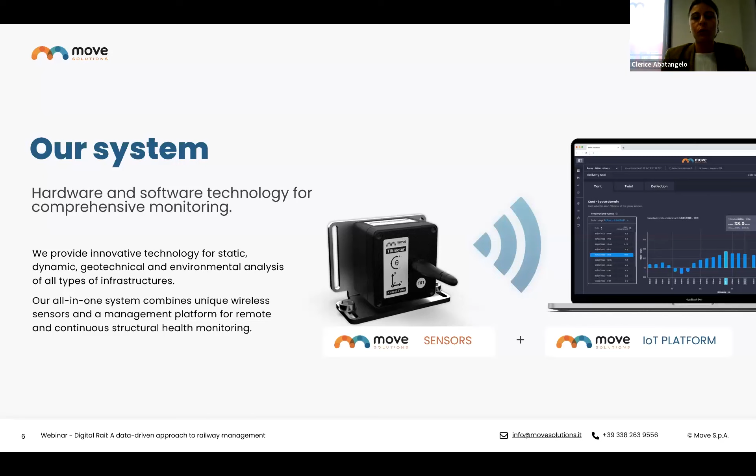It's an all-in-one system that combines a unique wireless sensor and management platform for remote and continuous structural health monitoring. As you can see here, this is our system architecture, where we have all the sensors installed in the specific infrastructure, buildings or dams or on the railway tracks or another kind of structure, and they communicate through the LoRaWAN protocol to a device that we call the gateway.

The gateway has a SIM card inside that uses the 3G and 4G network, the internet network, and sends all the data to our server. All the data ends up on our IoT platform.

On our IoT platform, you will see all the raw data, but not just the raw data, also the elaborated data. There are a lot of algorithms available, divided for the specific infrastructure, so we have, for example, the railways tools, the overlays. You will see specific tools and specific graphs where you are able to analyze all the data remotely, directly from your laptop.

Sometimes our customers already have their own platform, so we can also provide MQTT, FTP and API. So you will be able to see all the data directly on your own interface without using our platform. But for example, with API, you will be able to use our APIs on your own interface as well.

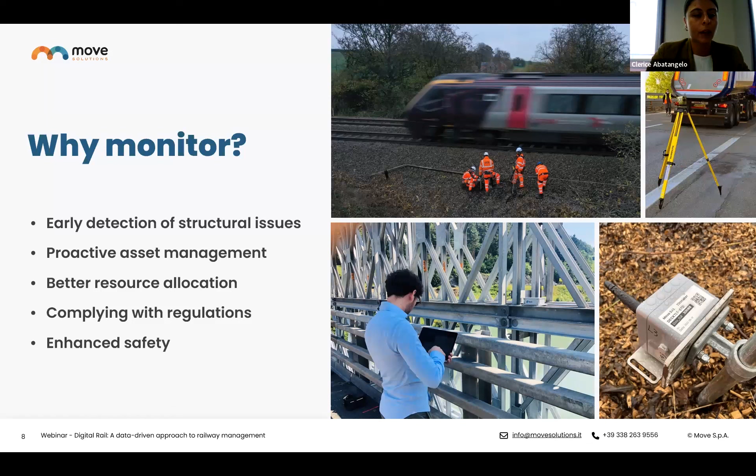We can do different types of monitoring. Thanks to our sensors, we can do static monitoring, dynamic monitoring, and geotechnical and environmental monitoring. So we have a comprehensive approach for safer and more effective asset management, developing specific solutions for different types of monitoring in order to analyze all the structural behaviors important for assessing the stability and health of a certain structure.

Talking about static structural health monitoring, static monitoring measures slow varying parameters over a long period of time, such as inclination, rotation, static displacement, and crack monitoring. So we provide products to monitor in a static way.

For example, our tilt meters. The tilt beam is a beam with our tilt sensor installed on it. And you can use our analog node and our single channel node, which are our data loggers.

For the dynamic part, dynamic structural health monitoring is used to handle dynamic loading such as frequencies, dynamic displacement, mode shapes, vibrations, and acceleration. With our sensors, for example our accelerometer, you will be able to perform modal analysis, and you can use our vibrometer to see the vibration.

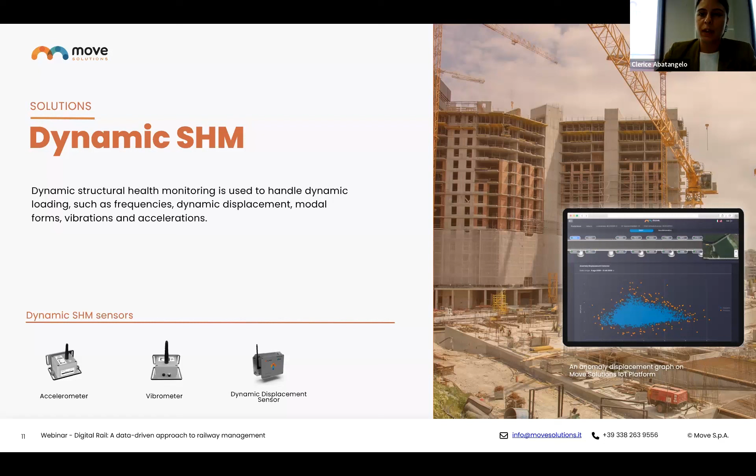Regarding the geotechnical and environmental part, the focus of geotechnical monitoring is on ground movement, settlement, slope stability, subsidence, and any changes that may affect the stability of a structure. Environmental monitoring instead looks at factors like air quality, water level, soil contamination, wind speed, and anything that can impact a structure's degradation.

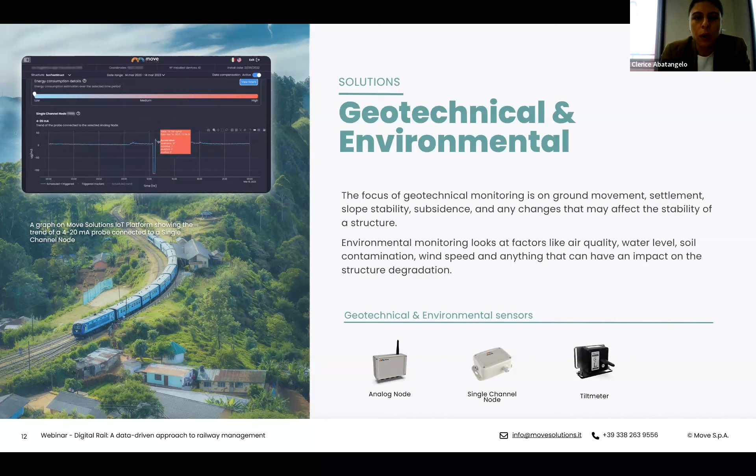So you can use our nodes, such as the analog node, single channel node, and tilt meter, to perform geotechnical and environmental monitoring.

Here you can see all of our applications, all of the industries where we are working. We have installations in construction sites, monitoring vibration. We have many installations on bridges, installations on railway monitoring, which is the focus of this webinar, and in other infrastructure like dams and other structures.

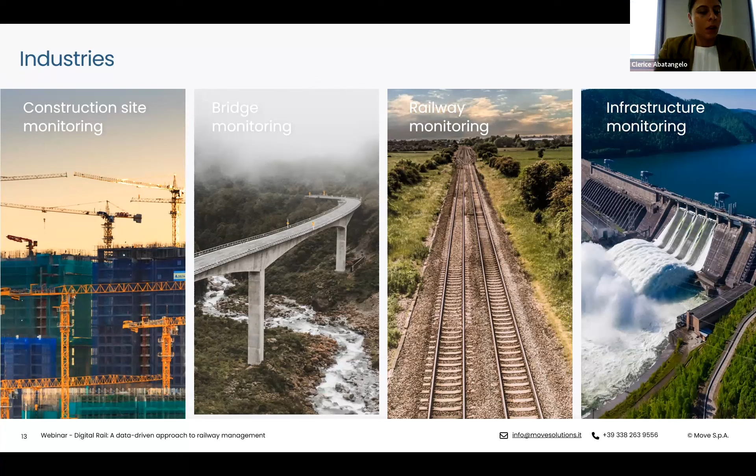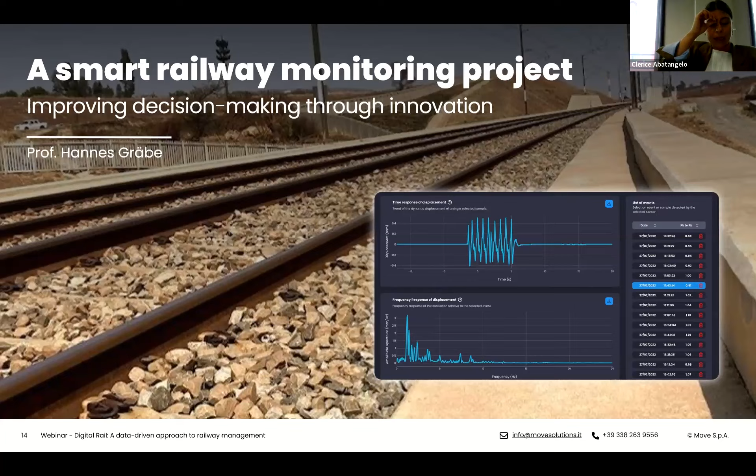So now I give the floor to Professor Hannes, who will explain his project. The professor used our sensors on a railway track in South Africa. Specifically, he used DEX, accelerometer, and tilt sensors to monitor a railway track. So thank you, Hannes, I give you the floor.

Thank you very much, Clerice. It's really a privilege for me to present this project today in collaboration with TANDM, our partner here in South Africa, and also with Move Solutions. I'm entitling this talk Smart Railway Monitoring, and I will be describing one project that we are currently busy with here in South Africa.

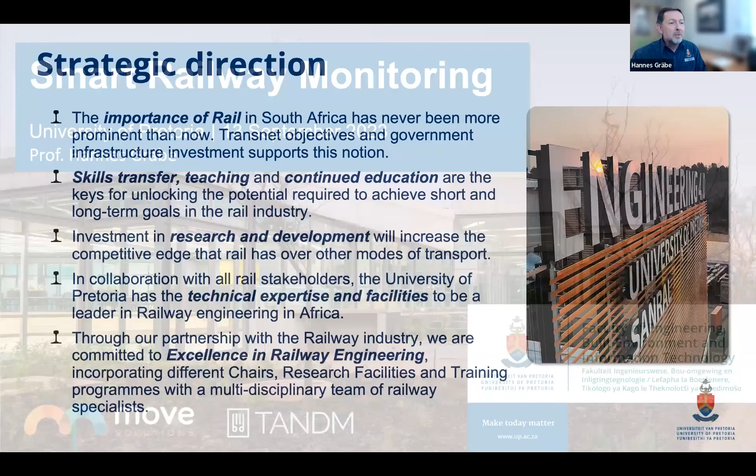So just to give you a bit of strategic background on what we are doing: rail is very important for us here in South Africa, and we are investing a lot in skills transfer and education. We invest in railway research and development, and we are gathering technical expertise and facilities to really make a difference in the world of railway engineering. This project is one of the big drivers as we pursue excellence in railway engineering.

So you might ask, what is smart track infrastructure? I think it's important that we quickly define smart track infrastructure in the context of railway engineering. Here it is important that we have a feedback loop and that we can improve our decision making. So we need to monitor, measure, analyze, and then complete the loop by communicating based on the data we receive from our sensors, and then we can make decisions that improve our maintenance and the operation of our infrastructure.

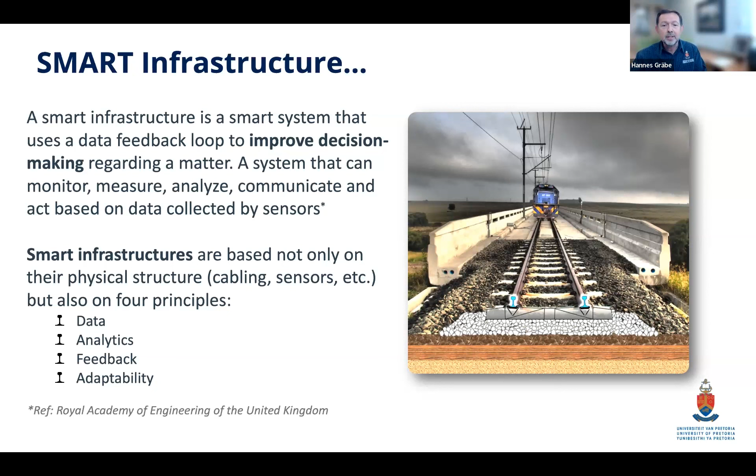One could therefore say that the digital railway is all about creating value at new frontiers and creating value in our core businesses. This includes proactive decision making, contextual interactivity, global connectivity, journey-focused innovation, technology, real-time automation, and then also linking people, ideas, and things.

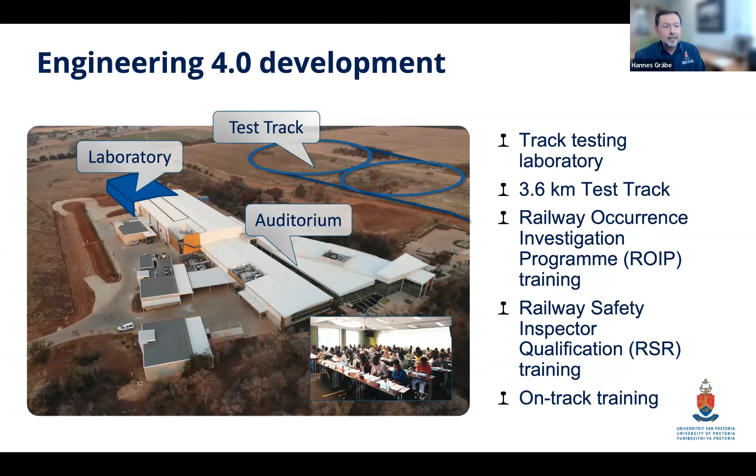We have, you could say, a playground where we experiment with Industry 4.0 technologies, and that is our Engineering 4.0 development in Pretoria, South Africa, where we have a laboratory and auditorium. We are busy with the planning of a test track, and we also present our training in railway engineering at this facility. So this brings together everything we need to really excel in railway engineering.

The facilities we have at Engineering 4.0 include equipment for carrying out a variety of track tests and accelerated testing on all track components. This equipment is used basically on a daily basis.

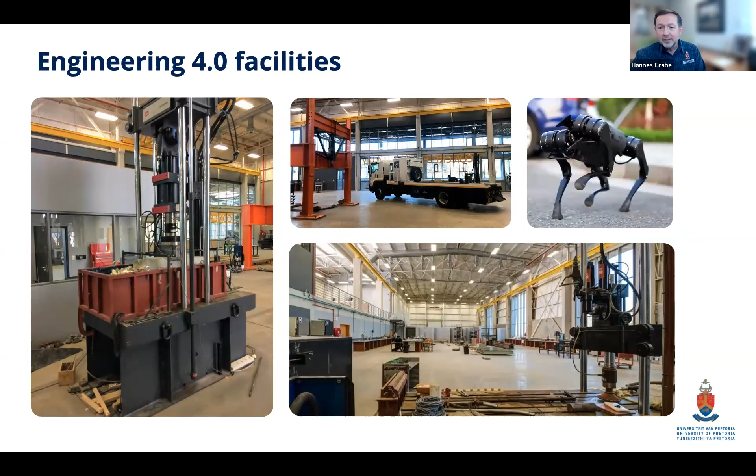But we also venture out into the field, and that is why I'm focusing today on a field project where we are doing real-time and long-term monitoring of a viaduct. This viaduct is situated on a rapid rail service line, between Pretoria, Johannesburg, and the international airport, O.R. Tambo.

This rapid rail project was constructed in 2010. It consists of a double line with a maximum speed of 160 kilometers per hour. Currently, the peak time between trains is about 10 minutes, and off-peak, 20 minutes. So it's quite a well-utilized and busy railway facility.

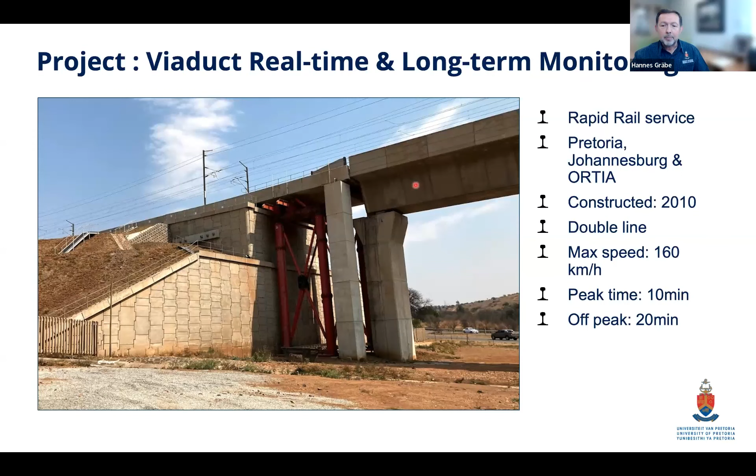As you can see, at this point we have a viaduct, and then we have a huge embankment, and that gives rise to differential settlement and a difference in behavior. One of our research projects is to manage the difference in track behavior between the embankment and the viaduct. This proved to be an excellent application for the MOVE sensors.

What we've done at the beginning of the project is to choose a control site in addition to the transition site. In this map, you can see what we call U36. This is where we have the viaduct transition, and then about 200 meters to the left, we have U35, our control site.

They are chosen fairly close to one another so that the dynamics of trains moving over these two sites would be similar. The speed would be similar, and the traction, whether the train is in acceleration or braking, would also be very similar. So we are comparing the behavior of the trains and of the infrastructure between these two sites, U36 and U35.

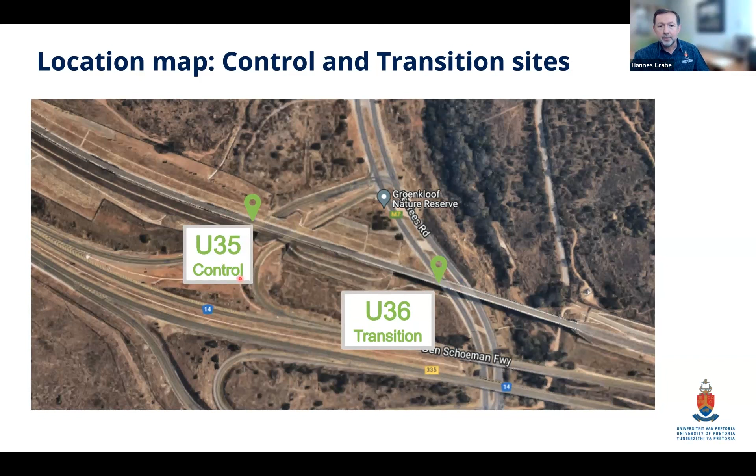Of course, we had to choose what instruments we would use, and for this project we basically chose the deck sensors measuring deflection, and then also an accelerometer in X, Y, and Z. So on the track, we decided to measure vertical sleeper deflection with the deck sensor, and then also have an XYZ accelerometer on the track.

We also decided to measure vertical deflection of the viaduct, and we did this at both sites. So at U36, the transition, and at U35, the control, all of this was installed.

The infrastructure, specifically the communication, is as was presented by Claire in her introduction. So we use a LoRaWAN gateway. Our sensors communicate with the gateway, and then we send the data from there to the management platform.

All the diagnostics that are included, namely frequency domain decomposition, displacement probability density functions, and fast Fourier transforms, that's all available, and I will show some examples of that shortly.

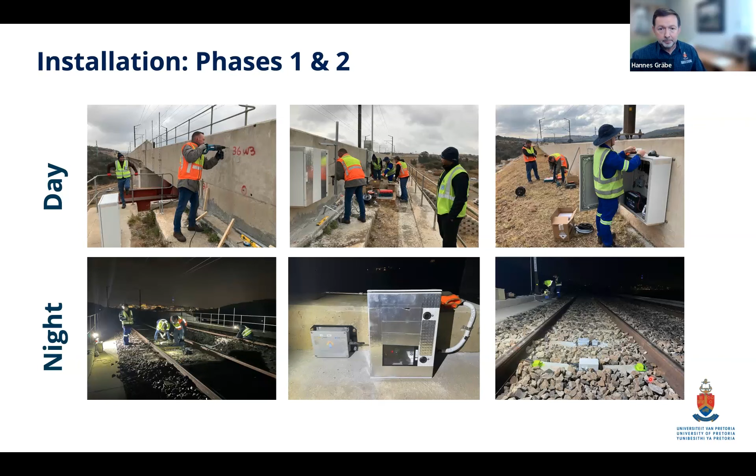Here you can see a better view of the system that we've put together. So we have a solar panel, and then we have a battery with a solar charge controller, and then all the communication, the LoRaWAN gateway, etc.

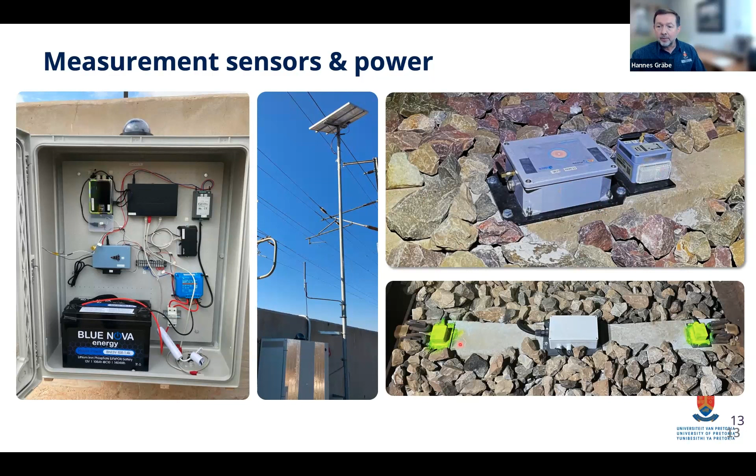And then we have the sensors. Here's the 2 sensors, the deck sensor and the accelerometer on the sleeper, and then some of our own instrumentation adjacent to that. We also installed optical track deflection measurement.

So we have a webcam next to the track that looks at the rail and then records a video of a train passing. It's triggered by movement, and then we have a secondary measurement of deflection also. And then here on the left, you can see the deck sensor that measures vertical deflection of the viaduct.

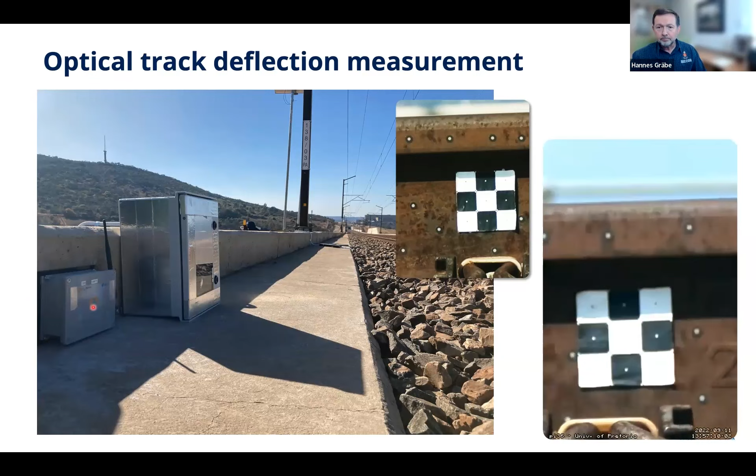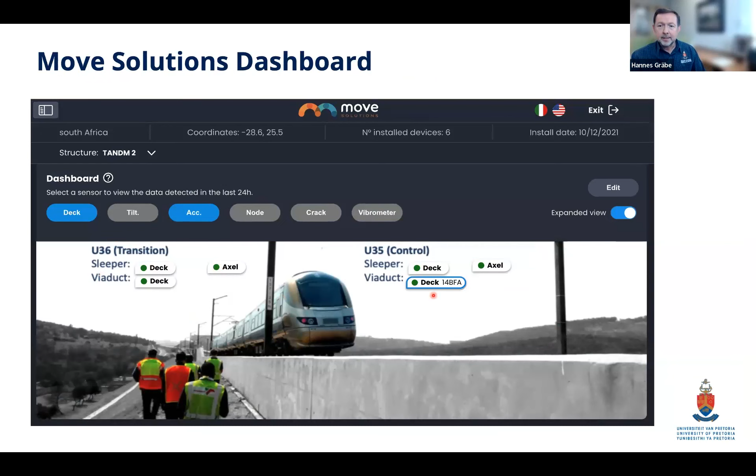And then very conveniently, we can have a look at the events at one of these sensors. So here you can see the deck sensor, which measures the vertical displacement. And this is one train with 4 coaches or cars passing our site. And you can then also see the peak-to-peak maximum deflection.

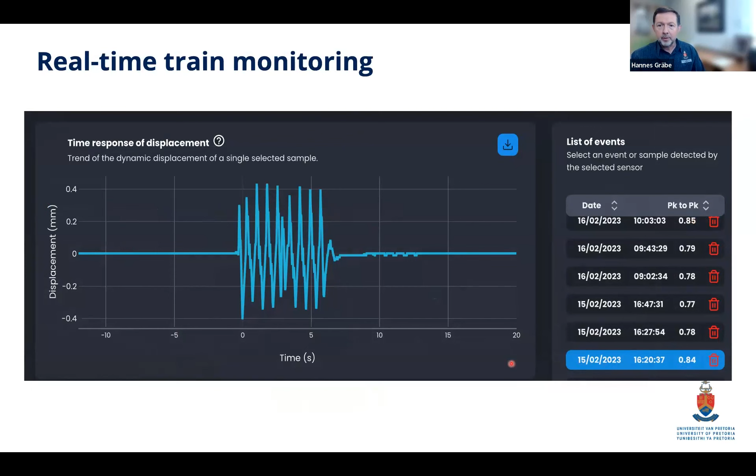So for the highlighted one, we have a 0.84 millimeter peak-to-peak deflection. And this was on 15 February of this year. We can then go on from here, and we can look at something like a frequency response of the displacement. And then there's various other tools, analysis tools, that we can use.

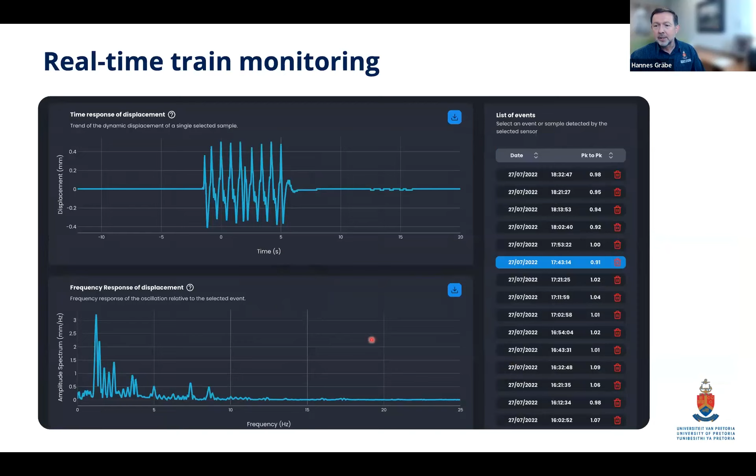For us, it was, of course, very important to have alarms and triggers. So with time, we carefully changed the resolution of the different sensors because that's configurable. And then we also configured alarms. So here you can see the alarms on the deck sensors.

On the sleepers, we have 2 millimeter alarms. And then on the viaduct, we have 1 millimeter for an alarm. And then also here on the right-hand side, you can see the triggers that were carefully configured. This was really depending on exactly where we've installed it. And you can see all the triggers are different, so we had to fine-tune them with time.

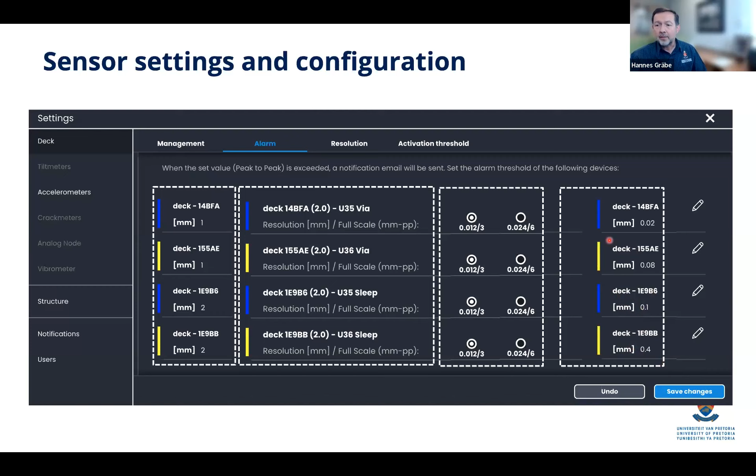But the sleeper at the transition, for instance, has a trigger of 0.4 millimeters. And then at the control, it's 0.1. And then the viaduct would have two different triggers.

Just to show you some of the very useful applications of it, we've identified what we call flat wheels. So that's wheels that cause high impacts on the track. And here, for instance, you can see that the first axle has a significantly higher deflection caused by that flat wheel. So we can identify those, and because each event is logged against time, we can pinpoint the exact vehicle and then correct that.

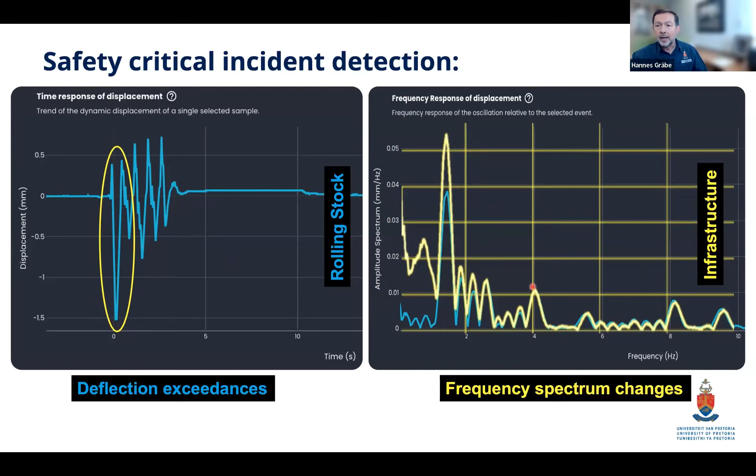And then we can also look at this—this is looking at the rolling stock—but then if we look at the frequency response of displacement of, for instance, the viaduct, we can detect changes in this frequency spectrum and then look at health monitoring and what that means for our infrastructure.

Moving on to some of the trends. At this stage, we have slightly more than 1 year of data covering a period of more than a year. And you can see at the installation, this is in July '22, we've moved through an entire seasonal change up to September now, where we can see maximum temperatures rise in our summer and then decline again in winter. And we are moving into summer again, and we have that full spectrum.

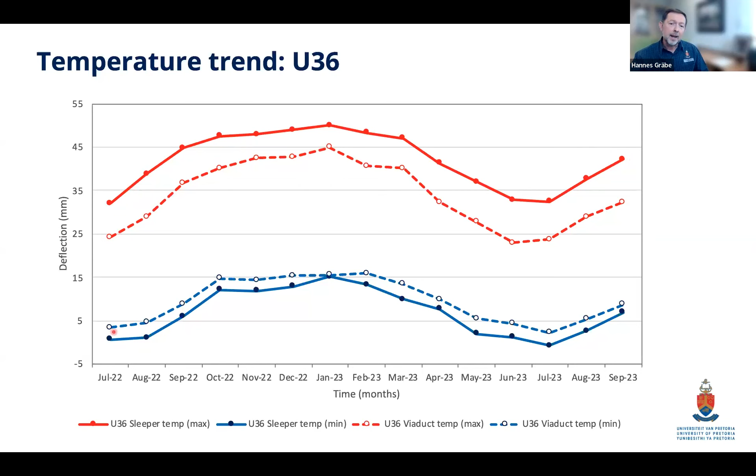We can see here the maximum of the sleeper and the minimum, those two solid lines, and then the viaduct, which is the concrete structure with a slightly lower maximum temperature and a higher minimum temperature through this cycle.

Also interesting, if we look at the accelerometer, we've witnessed a slight but observable decline in the accelerations. So this is indicative of consolidation of the track with time.

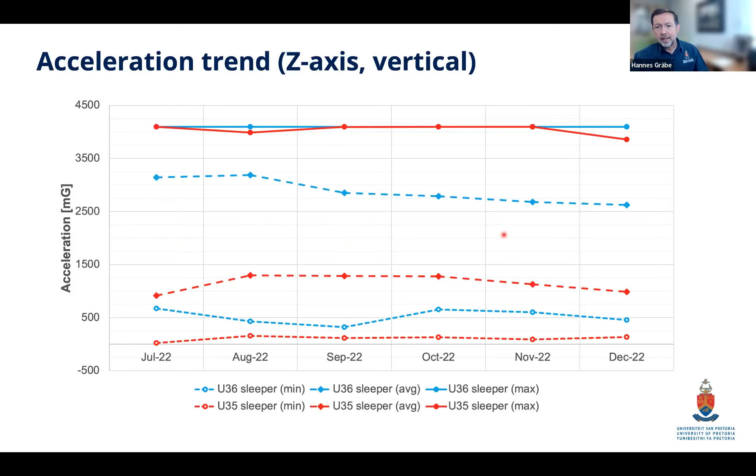So that does not have any resemblance with the temperature changes, but it shows a clear decline as the track consolidates, and that will change then when maintenance takes place. This is, of course, acceleration in the vertical z-axis. And again, we measure this at all the different positions.

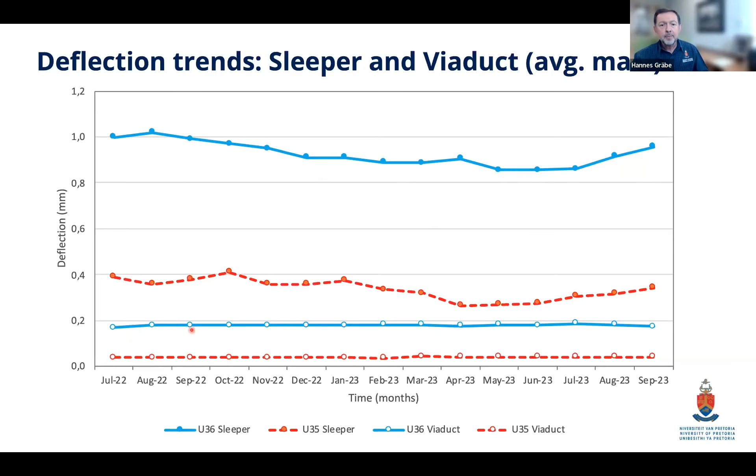If we then look at the deflection trends, you can see here that since installation, the sleeper with the highest deflection decreased. And as we move into summer now, there's an upward trend again. We believe that this is all temperature related. The two graphs here at the bottom are the viaduct measurements at the control and the transition. They remain stable, and that is as we would expect.

Bringing the data together enabled us to determine a very clear relationship between the deflections that we measure and the temperature of the rail. For the two sleepers that we instrumented at the transition and the control, the daily peak deflections per train events ranged between 0.89 millimeters to about 1.67 millimeters, and then also some trigger events that would give us an alarm sent on cell phone and email.

You can see the clear relationship with the temperature of the rail. This is a trend that we wouldn't have been able to establish without this 24/7 monitoring with the MOVE instruments.

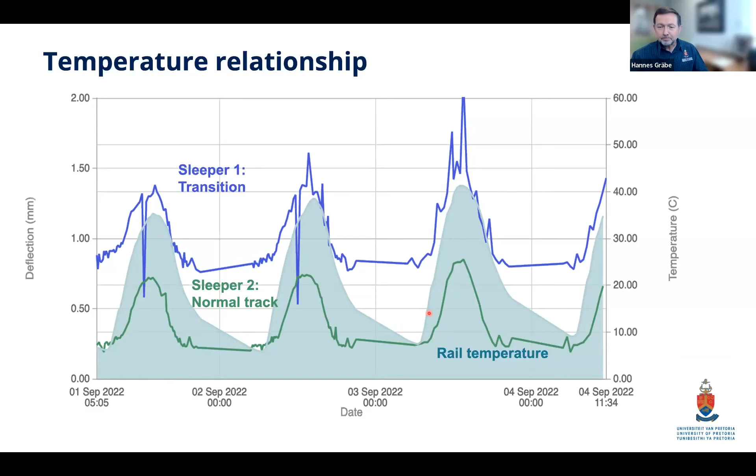That really brings me to the end of my presentation, and just a couple of conclusions. We are really extremely happy with the performance of the system. It's been very stable, and it's given us reliable monitoring over a year. The data ranges from 4th of July 2022 to today, giving us more than a year of data.

Since the baseline date, we can see the seasonal trend in temperature changes. And then on an event scale, we see a strong temperature-deflection relationship that we've established through this work. In the long term, there's a downward trend when we look at vertical deflections and accelerations, and that indicates track consolidation.

The real-time monitoring with LoRaWAN communication enables us to push through alarm notifications and to put together some very informative trending graphs that I believe are very useful, not only for our research, but also for the client and the owner of this transportation system.

So in future, we are looking at expansion of this project and using more of the sophisticated trending analysis that I have just touched on here and there.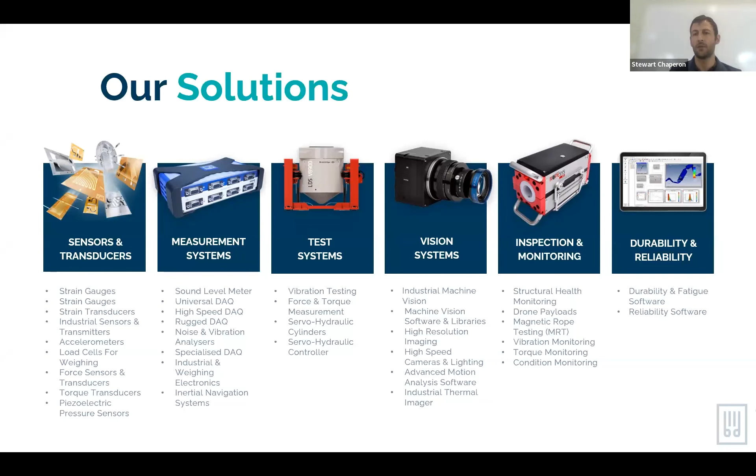One thing I want to highlight is we're very excited to have our TCC for 2023 coming up. This is the TANDM Community Connect Conference, where we invite our industry partners and customers to come and present on measurements and projects they've worked on through the year. It's a good opportunity to meet fellow colleagues or people in industry doing similar work to you, and get inspired by the engineering community in South Africa. We also have a selection of international presenters, so it's not only local projects but also international projects. Registrations are open for that. We'll have some demos there as well, and equipment, and it's good to meet and see each other in person.

We've got two sessions. We're going to have the first one in Pretoria and the second one in Stellenbosch. Early bird registrations are open for that until the end of September.